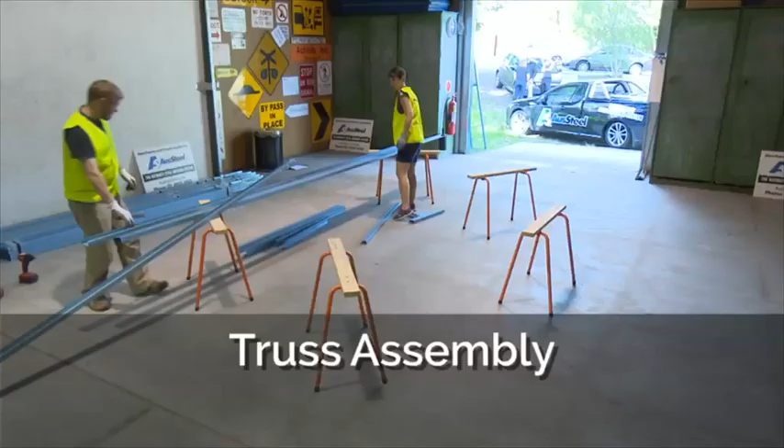We're now going to build our first trusses.

My wife and I did fight in the first run, so hopefully we won't do it again this time.

The tools and the equipment you will need: a Stanley knife, a texter, the plans, some chisels, a Phillips head bit and a Tek head bit, as well as an impact driver and the appropriate PPE. You'll need some trestle tables or some sawhorses or even some 44-gallon drums just to keep them off the ground to help with the build.

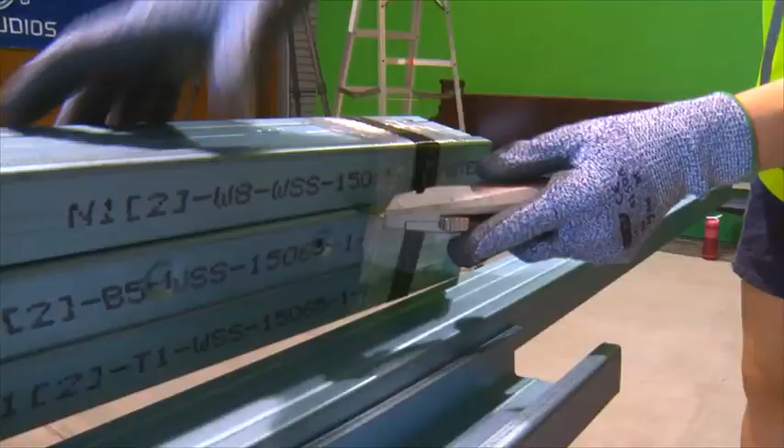You'll have your tables laid out. It's easier to build your trusses one on top of the other. You'll grab your second bundle and then you'll cut it and then you'll open up the pieces, laying them out from the bottom and top to start with.

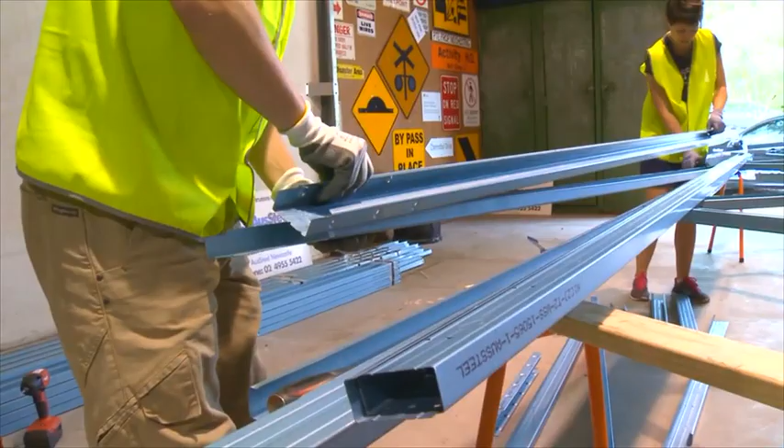This particular truss is our back-to-back truss. You'll build it from the flat side up with B3 and B4 to start with. Again, with B3, make sure the label is on the left-hand end.

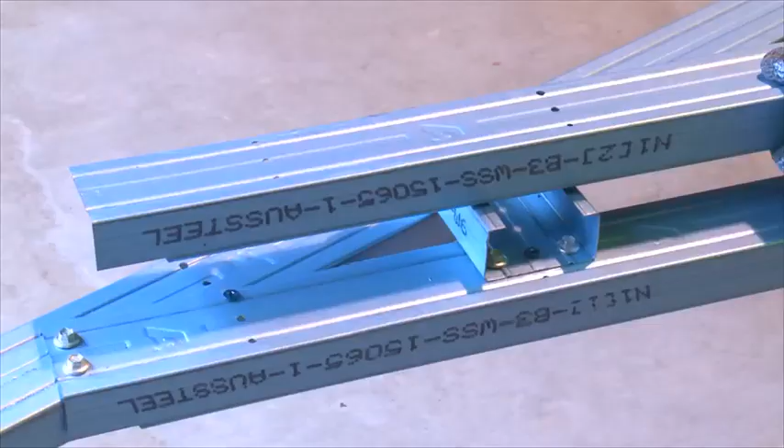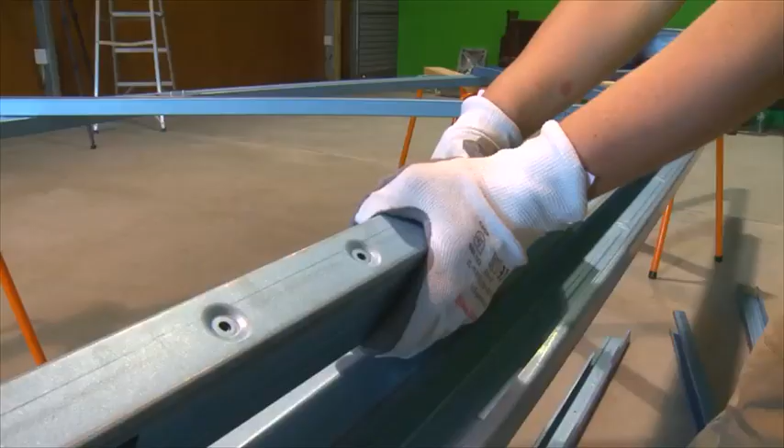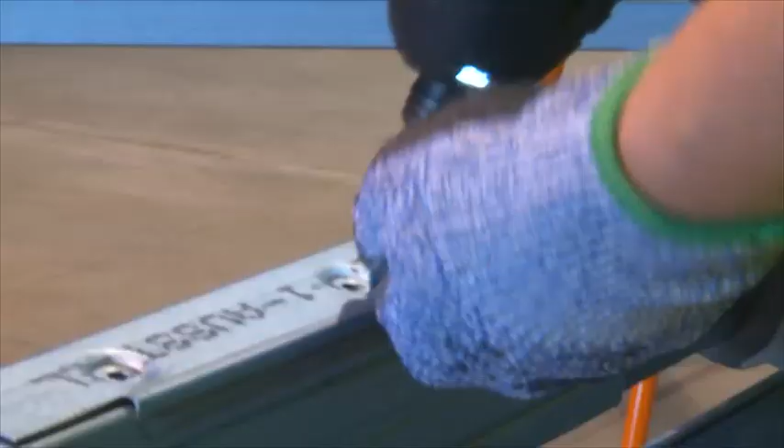Now, when joining your bottom chords together, you'll use B4 and they will box together only one way. Other side as well. We'll now screw B5 into B4 on both sides.

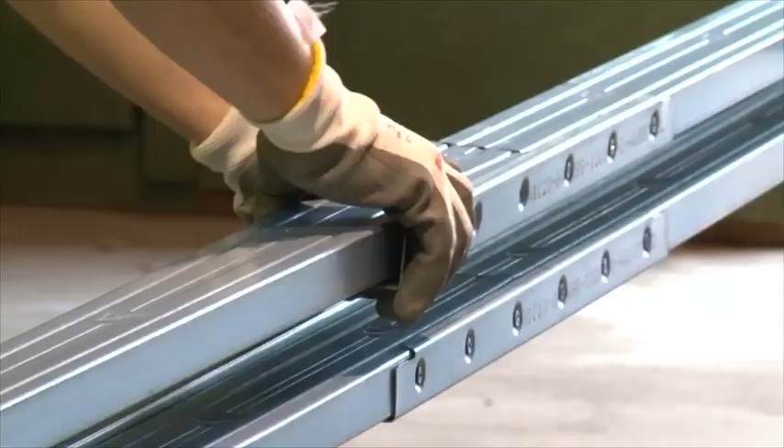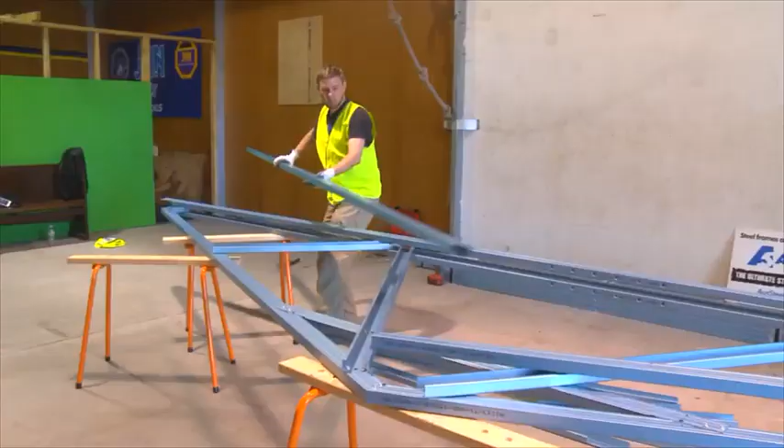We'll now take T1 and T2, which will now form the apex of our truss. As you line up the two top chords, line up the bottom hole. Once you have fixed off the top of the apex, you will then fix off the top chords to the bottom chords. You'll line up the two holes, the top of the bottom chord and the bottom of the top chord.

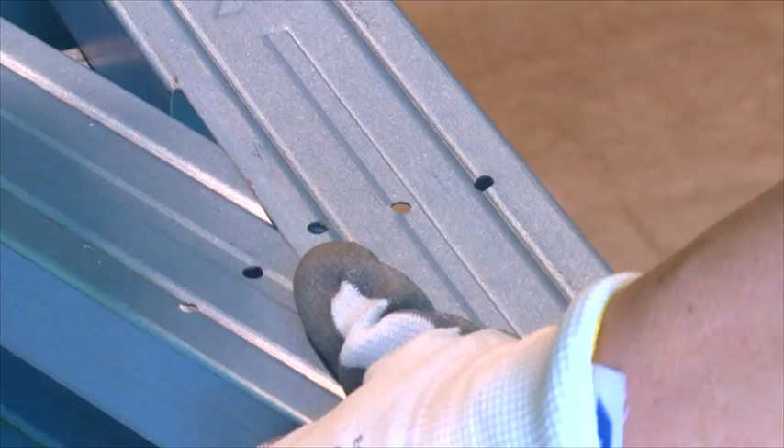We've now repeated the same process on the opposite end. We'll now take R12, which is our rail, which will form the top of the apex of our truss. Again, we line up the bottom hole of our top chord and the top hole of the rail.

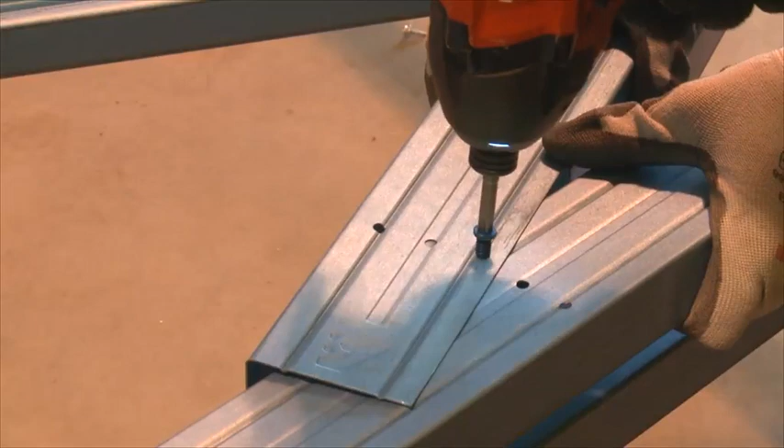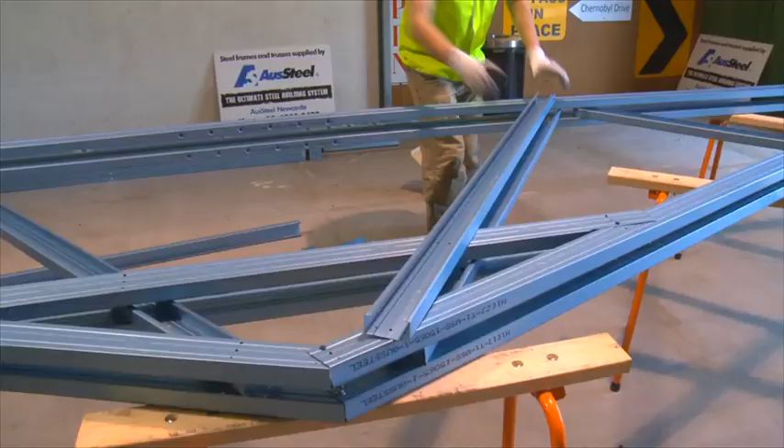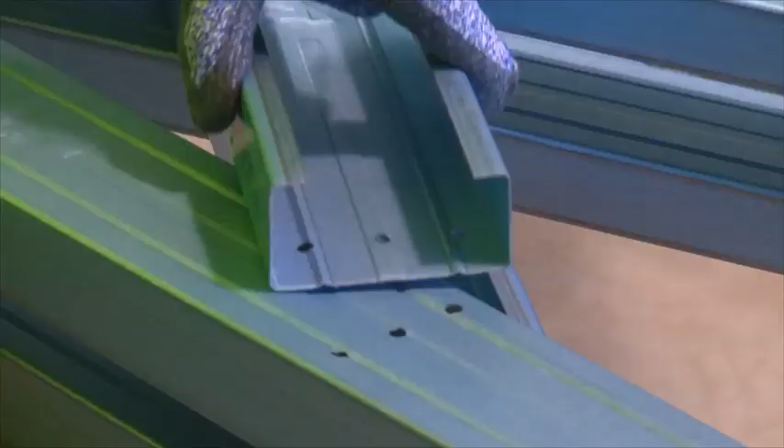We now grab our webs, W8 and W9, which form the centre of our truss. We then move from left to right. Now, fixing off your webs, you will fix off from the middle hole of each web into the middle hole on the top chord. Once you've fixed off your webs, make sure that the holes line up from the web to the rail.

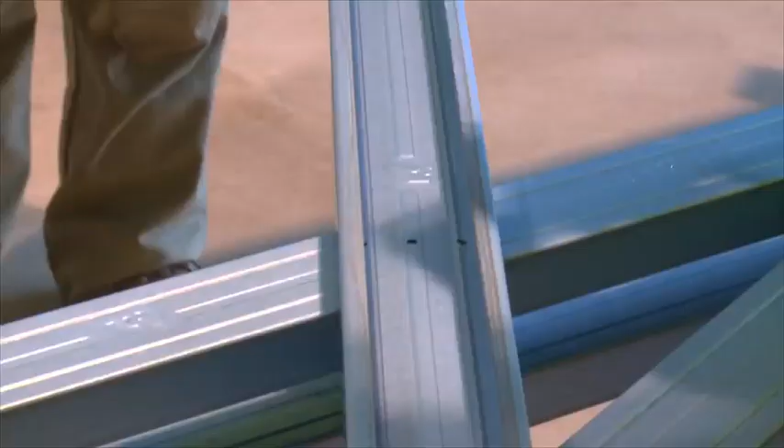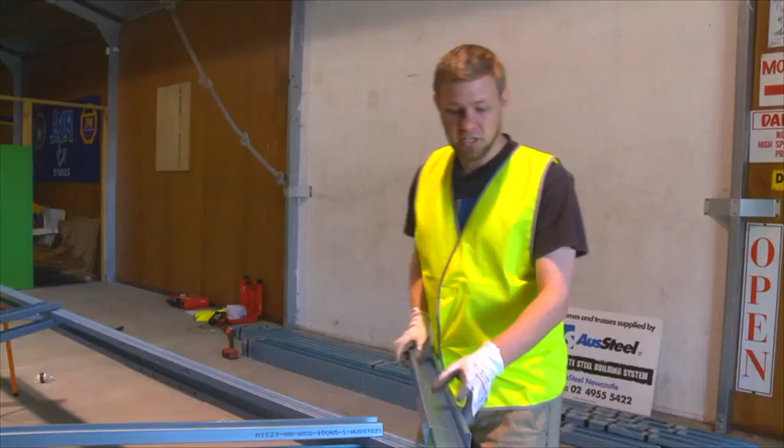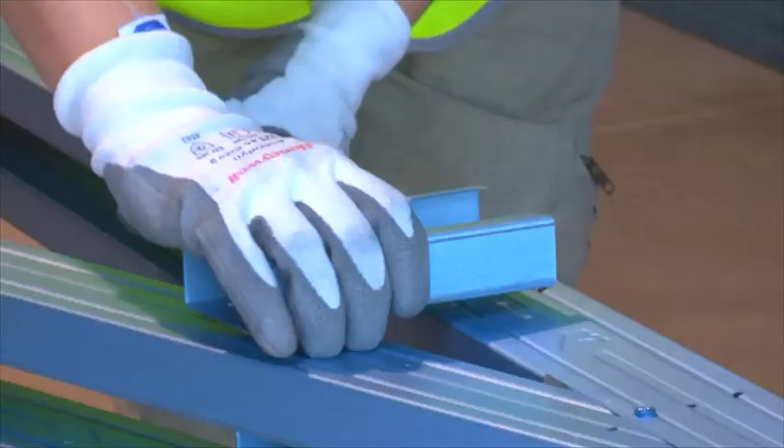We now fix off the webs coming to this side of the truss on the left side first. Make sure that the web hole, the middle holes, line up. We're now placing the last web on the left-hand side. Make sure that you hold on to it when it's being screwed off. We're now going to do exactly the same on the other side with the remaining webs.

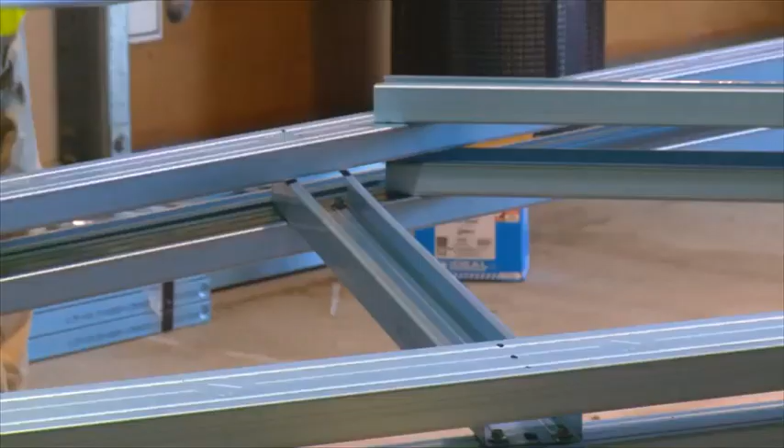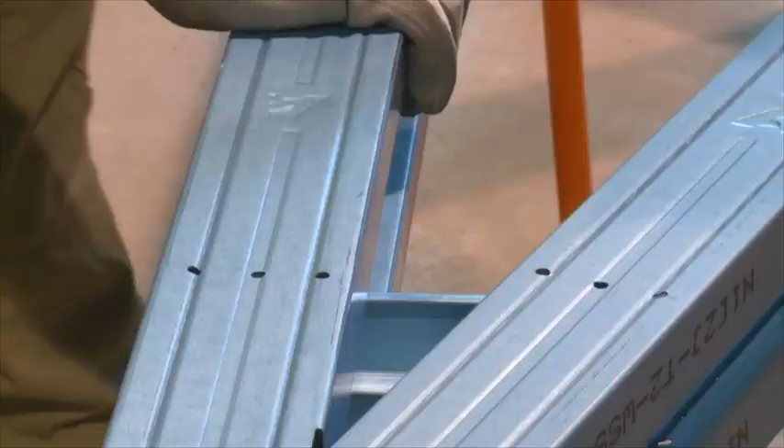We'll now change our Phillips bit with our Tek head bit and we'll fix off two Tek screws to each web.